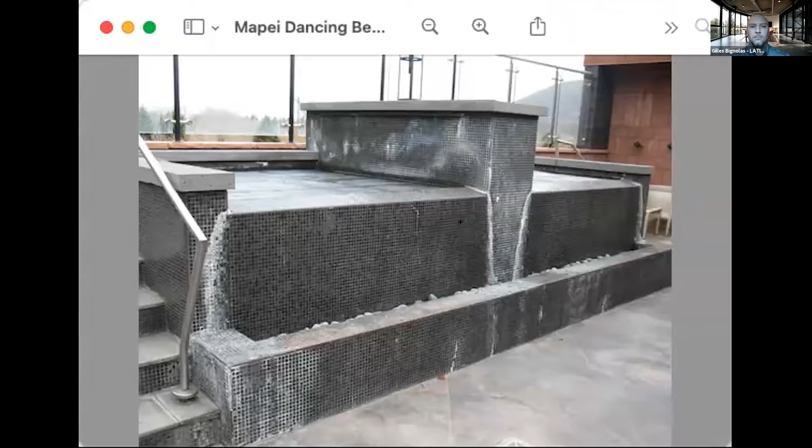Hey, real quick, Gilles had his hand up to comment on something there. Can we go to him? Yeah, I just wanted to note that typically for cementitious grout, we tell people to wait 14 days. If it's an epoxy grout, we tell them 10 days. But I also want to emphasize the fill rate. After that 14 days, you want to fill that pool at about 1 inch an hour.

So about 2 feet per 24 hours, because the expansion that happens when you're filling the pool can be tremendous. Typically a 50-meter pool is actually going to expand almost a 1/2 inch just by filling it with water. So having all the materials completely cured is very important, and filling at the correct rate so that it doesn't blow out everything, especially when there are no movement joints.

That's it. That's all I had.

Yeah, awesome. Again, you're seeing a picture of a large hot tub in a hotel in Aspen, outside, of course, and lacked cure time, and just a phenomenal amount of salts coming out of it. Jim, can you explain for all of us, just so we really understand what that white stuff is that we're seeing there? What is that stuff?

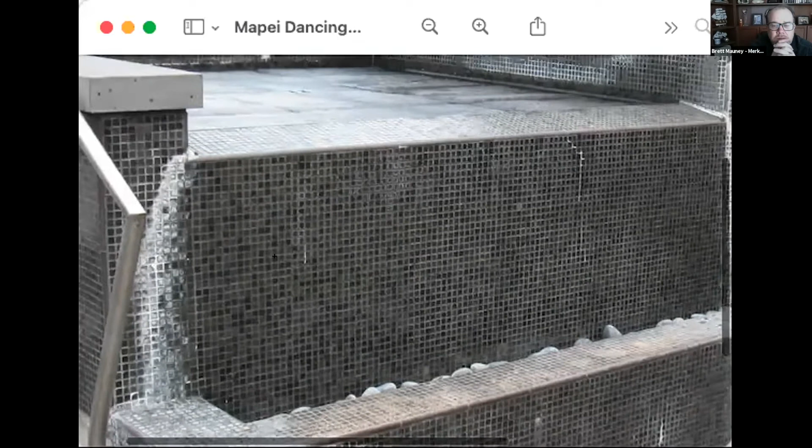So you're seeing a couple of things there, actually, and that's where it gets a little bit confusing. The easiest way to talk about efflorescence is soluble salts. So that means if I wet it down, it typically kind of goes away, right? Because it's soluble. And it's in the alkali that's in cement; there's a water-soluble alkali in cement. And if it doesn't cure properly or it gets really soaked early, sometimes they'll come to the top. You see it more frequently in grout.

Latex leaching is a different animal, and that's what you see on that back wall, where it actually looks like diluted paint coming down through it. And that's not the same. You can wet that down and it'll stay there. That's just latex coming out with the water. So it's a solid. When it hits the air, it wants to become a solid again. But when it's in water, it doesn't. So you're seeing a couple things going on there, unfortunately.

Does that help? Yeah, that does help, Jim. Thank you. And the easiest thing to help prevent this is cure time, right? Yeah, correct. Cure time and scheduling. And this is Mike Micalizzi. Another issue that we see a lot is these exterior applications aren't protected. So you can get rain or snow. You've done a beautiful job, everything's perfect, and then you get rain on all your materials before they set or cure. And as Jim was saying, you get all that latex leaching out. So protecting it for a period of time afterwards is also important.

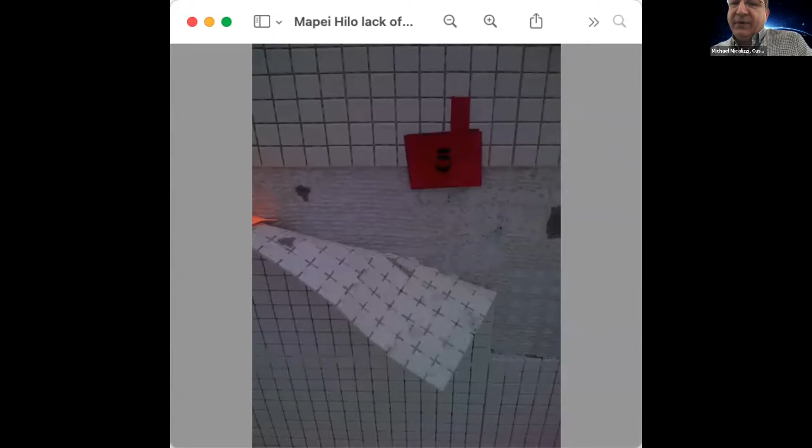And if I could add something to that, Jim, one of the things that we've seen on these glass mosaics is contractors are going to beat the tile in with a rubber float. When the rubber float gets wet and you start beating it in, sometimes it causes a suction. When you're pulling the float off, it literally can cause some voids under the tile. So you have to be careful when using your float that it's not too wet.

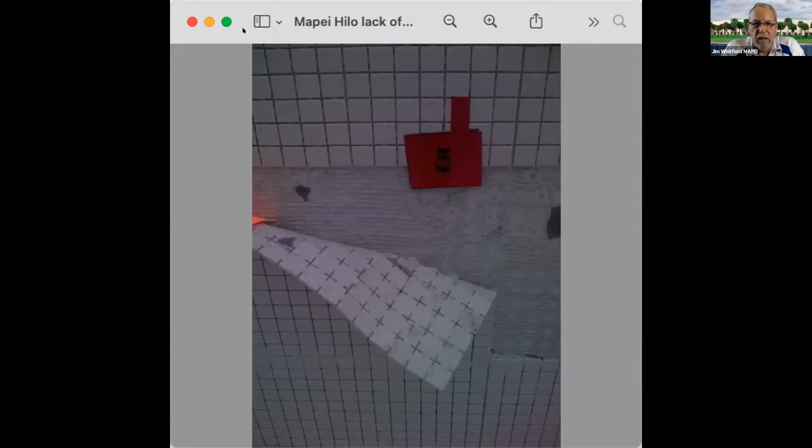That picture there just speaks volumes. It's a shame. On coverage, it's a true shame. Again, this is a large school. This is a big pool, and it had terrible coverage. Chris Kane.

I wanted to mention, it's been mentioned about protecting the pools from rain and snow. I think it's also important to mention protecting it from temperature as well, especially the outdoor pools. Everybody wants their pools for summer, so their pool's done in winter, spring, maybe the fall. And even if it warms up during the day, what's happening at night? So it's important to monitor that, the period before, during, and after the install has to be within range for the temperature.

Good point. Chris, what would that temperature range be normally? Well, it depends on the product. You definitely want to be above 40 in all cases, and sometimes it could be above 50 or 60. At the same time, you don't want to be too hot either, so usually not over 90, just general rules. And even though it might be 50 or 60 air temperature at the job, what was it overnight? Is that substrate in the 20s?

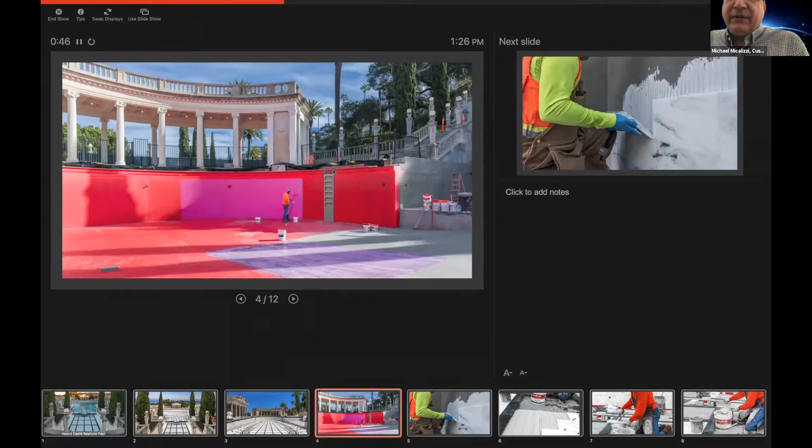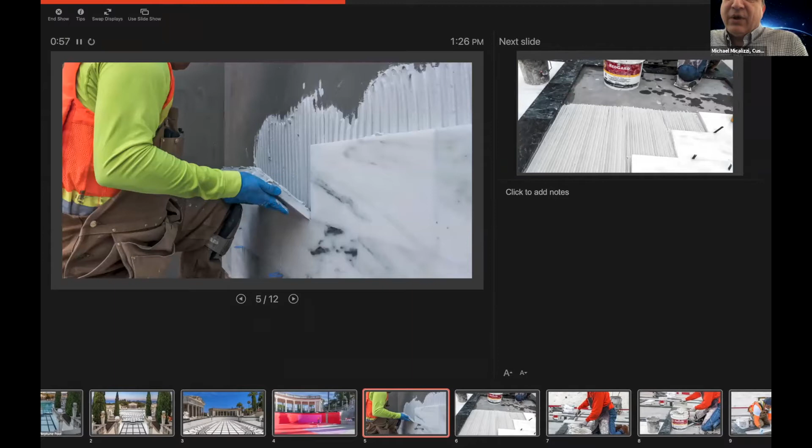So all of the things we've been talking about are real critical, being able to protect the surface and keep the water from going. All of the penetrations when they used the waterproofing, they had to be really careful because you wouldn't believe the elaborate system that they had directly below the pool that monitored all of the filtration and the water flow. The engineering underneath this pool was amazing.

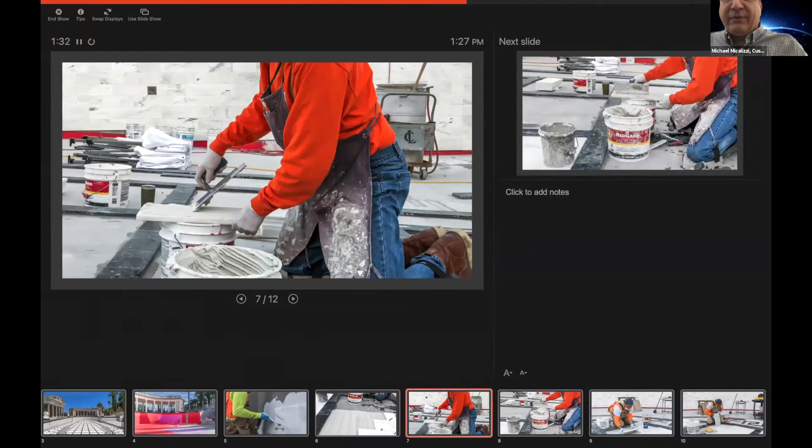And the other thing that was critical was, and this is funny, the stone that was inside the pool, the pitches were not correct. So they had some areas where it wasn't flowing properly. But the Historical Society said that these contractors had to do a topography of the entire system and reinstall all the stone exactly the way it was, right or wrong. So that's what they had to do. So they had to map this whole thing out.

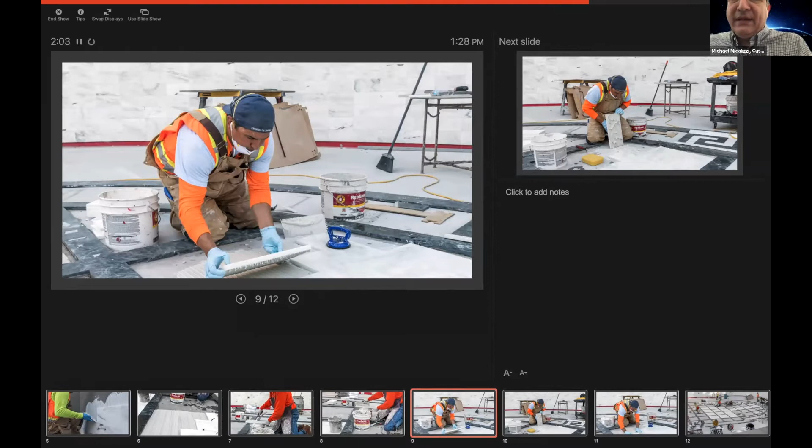But the critical aspect here is, if you see in these series of pictures, the guys took real care to make sure they had good mortar coverage. That was one of the big concerns that they had. Like you see here in the top right picture, every stone that they put in, they picked it up to make sure that they had good coverage.

Yes, thanks. So, I hate to harp on glass tile, but glass tile has become very popular and it's used a lot in the pools. And what we're finding is there have been failures due to the resins that are used in order to put the sheets together, in order to bond. And so what you run into is as the pool goes underwater, some of the glues that they use to adhere the mesh just start to dissolve or start to react in the pool environment. And the next thing you know, your tiles are failing.

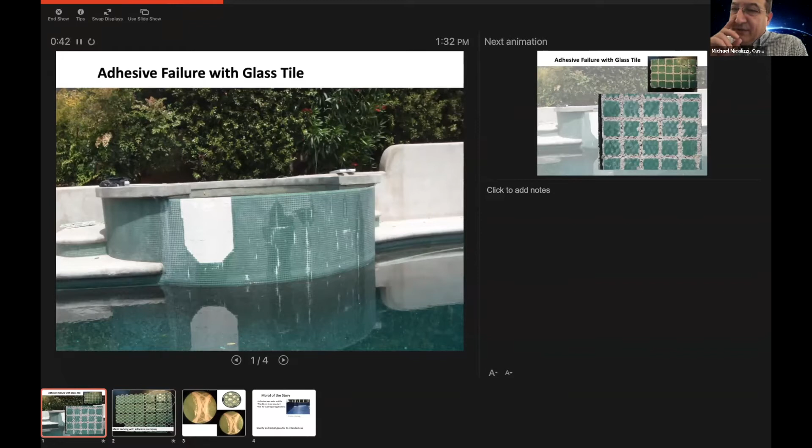People send in tiles for us to test so that we can do bonding tests and do them in an immersed area. And we look for reactions like this. But one of the first things that we do when we receive these samples is we take the sheet and we put it in a bucket of water, and we leave it there for probably 5 days, 5 work days. Check it on the following Monday, and see if the tiles stay well adhered, and see if there's any reaction. So I would suggest strongly that if you have any mesh mounted tiles you're going to use in a wet area, that be the first thing that you do.

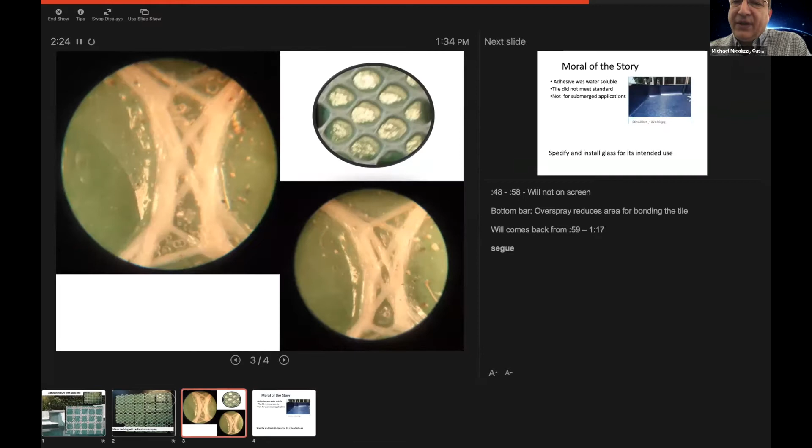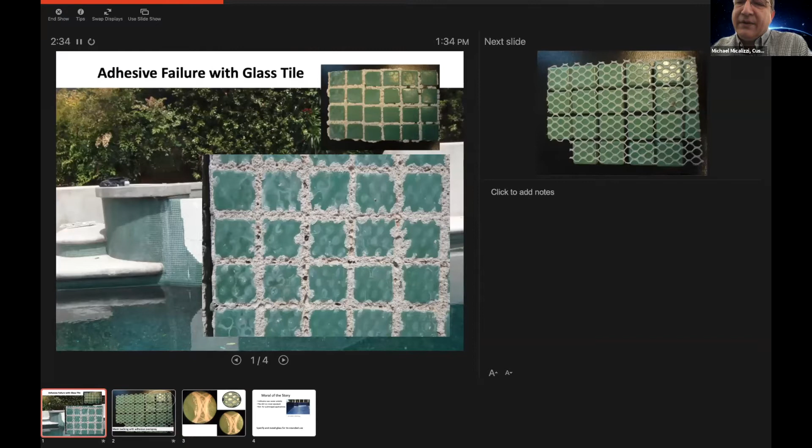We've done bond tests with different tiles with resins on the back, and with resins that are applied very thin, we can get a really good strong bond strength. The ones with a really thick buildup of resin, your bond strength is diminished, could be up to 90% reduction in bond strength. So it's something just to be very aware of. Anytime you have a mesh, do some really good testing, send it into your manufacturer that you like, have them take a look at it for you, before you have to go through the nightmare of replacing it.

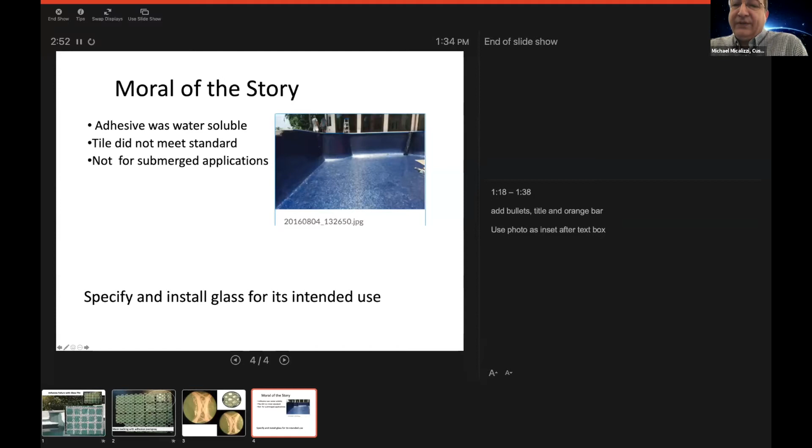And someone asked where these tiles are coming from. I think we all know that the knockoffs that people purchase out in China have been a major issue, not just for glass tile, but for tiles claimed to be porcelain, but they're really not porcelain. And then they're installed in a wet area and they warp and have absorption rates that are not at 0.5%, but more like 10 to 12%. And so they've been a real issue. So anytime that you get something outside the country, it's something to look at and consider.

But I would say anything that's mesh mounted, put it in a bucket of water. That's your first test. And then if you want, contact your manufacturer. Most manufacturers are more than willing to take a look at the tile for you and give you some feedback and help you through the project. And note that the larger the glass tile, the higher the risk because of that thermal expansion component of glass. So the larger the glass tile, the more the risk.

Also add something just to piggyback what Mike is saying and what Greg is saying. ANSI A137.2, right? The glass tile standard now has a submerged methodology to evaluate if glass tile and glass mosaics are suitable for submerged applications. So Mike gave you all the tips on looking for that, but there's an actual ANSI standard for it now. And it's a submerged application that's an extended type test. So you could even ask your glass manufacturer, do you have A137.2 certification for this glass to be used in submerged applications? And that usually is a good qualifier too.

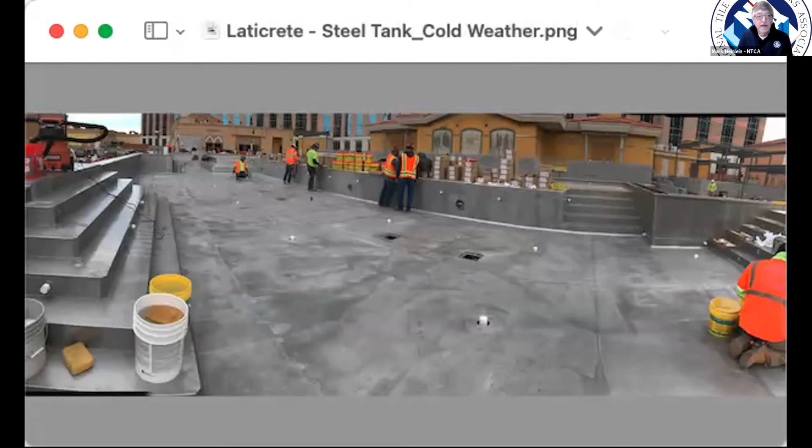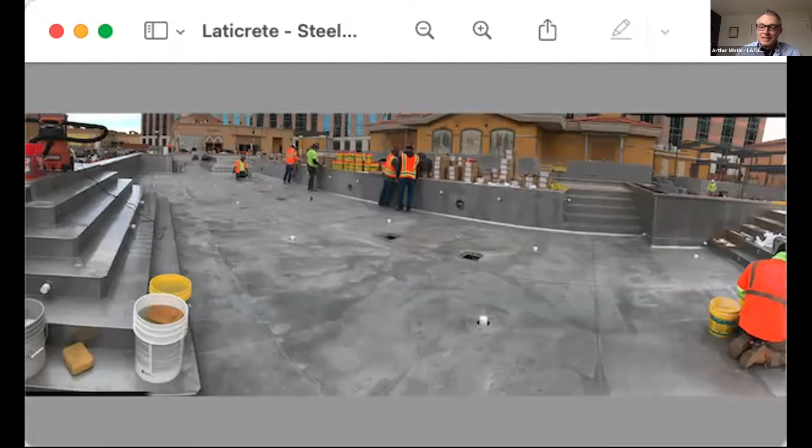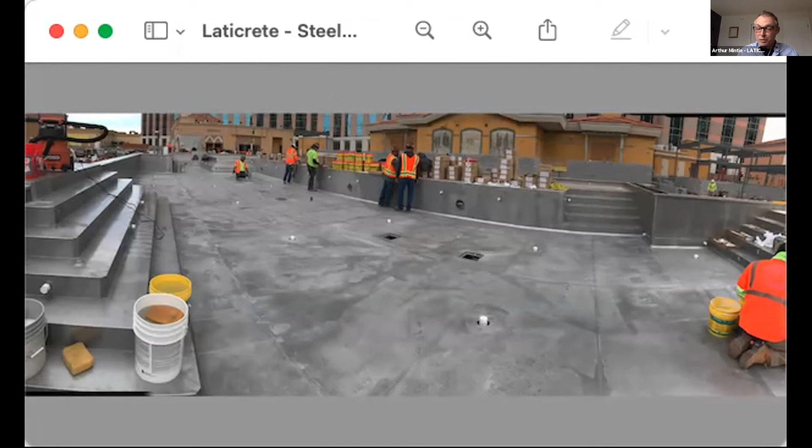Okay, so I just wanted to highlight how there are different types of pools out there now too. We're always used to the traditional concrete cast in place or formed gunite type pools. But what we see increasing in our industry are these steel tanks. Now, this one is a massive steel tank. This is on top of one of the hotel casinos in Las Vegas. And if you take a look at this, this is pretty impressive. And it's really a simple installation, believe it or not.

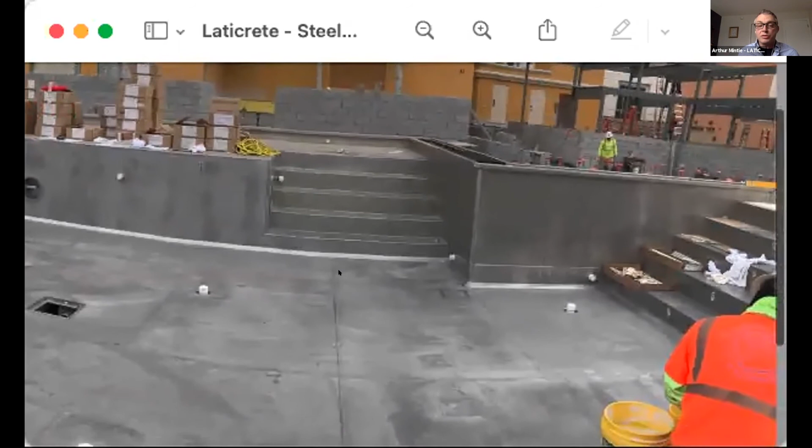Obviously, everything has to meet deflection criteria. The conditions have to be good. But basically, it's a direct bond adhesive type with an epoxy adhesive. And then you grout it with an epoxy grout. And these types of tanks are solid. You cannot get that tile off afterwards.

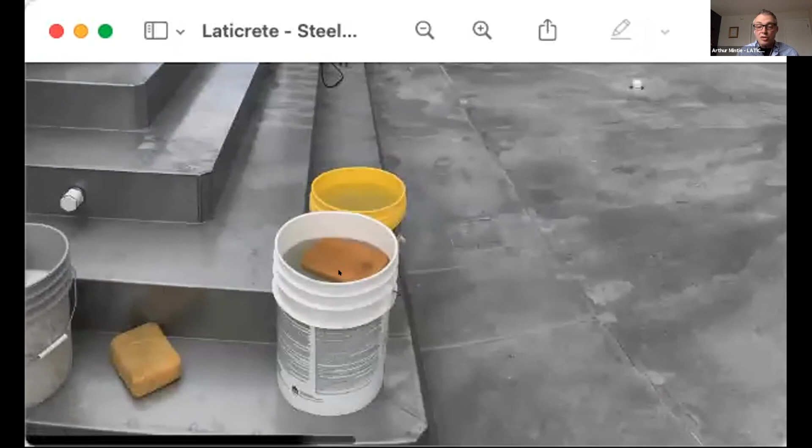And the benefits to these systems are that they're very lightweight in comparison to their concrete counterparts. So they're installed in places where you typically wouldn't see pools. They can also be hoisted and lifted into place after the fact for renovation purposes. And the great part is it greatly expands the opportunity to consume more tile.

And that's what's interesting to all of us, right? So I just wanted to highlight this, and this is something that's very popular. And at some point, I hope that we can get some installation methods in the handbook for this, because it's very, very popular and very successful as well.

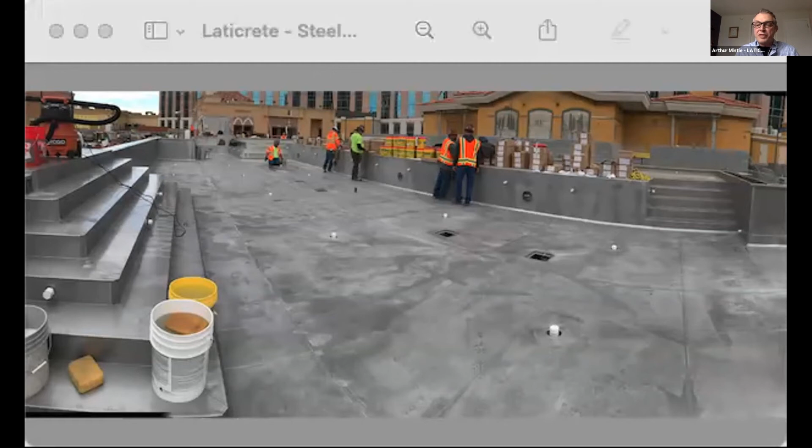Art, will you talk about cleaning it? Sure. So most of the steel tank manufacturers are going to have their own proprietary protocol, if you will, to clean it, right? They call it a pickling process or passivation. And it's basically just some sort of method that removes any fabrication oils, because as they're putting this together and welding it, there tends to be some residue from fabrication. So just follow their proprietary method of removing that and let it dry, and you're good to go. It's that simple. It is an important step.

And the only other thing I'll mention is that where we can run into issues with stainless steel is with transparent glass. Sometimes the adhesives that we have to use for steel are not as white as what we typically want used with regular cement type pools. And so sometimes you can change the color of the glass, and that's another important thing to test if you're doing mock-ups, is how the adhesive may or may not affect the color of the glass.

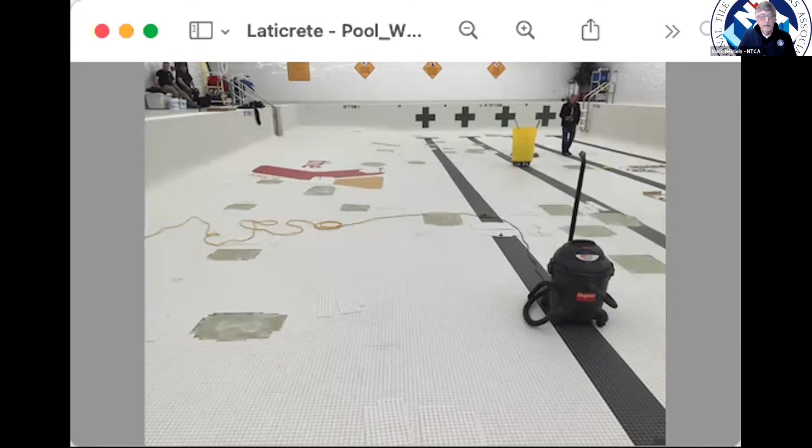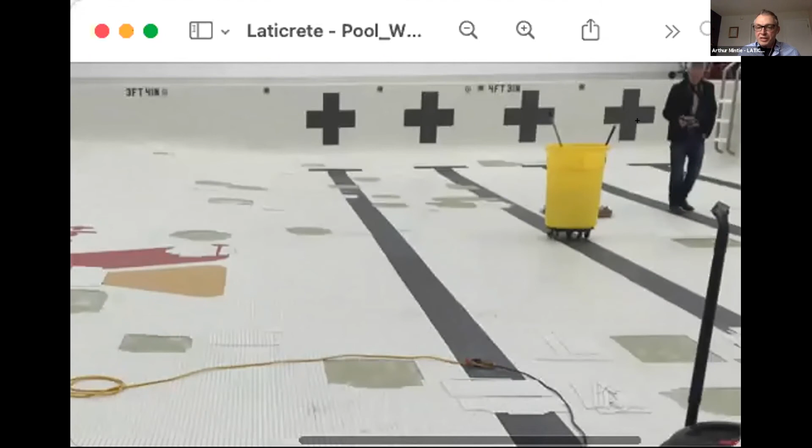To shift the photo on you there, Art. What are we looking at here? Okay, so we all have these great photos of semi-catastrophes or major catastrophes in our portfolios, right? We've all been on the movement joint issue, and that really is probably the most critical element in these applications. And we hear the argument all the time: once I fill my pool with water, nothing's going to move. You're right. However, in practice, these vessels, no matter what size they are, require maintenance of some sort. Maybe it's not even the tile that needs maintenance. So they're emptying the pools, refilling them, on and on.

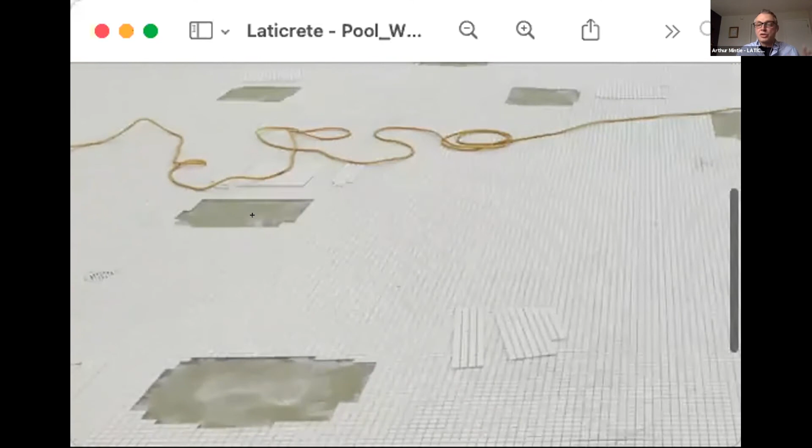So this is a pretty large pool in a public recreation facility that had no movement joints in it at all. So guess what happens when you empty the pool? Jill mentioned water drain and fill rates. On the draining side, draining a pool is really stressing the installation, especially if it's exterior, because you're removing the entire weight of all that water very quickly. The top surface is going to dry out quickly in the sun, while the bottom layer remains saturated. You've created a huge differential. And what happens? You get pop-outs. The tile will actually tent. That's what happened here: no movement joints, the pool was drained very quickly, and we got pop-outs.

And now there's a membrane that's installed directly underneath the tile layer. Guess what that membrane is trying to do? It's trying to accommodate that movement. It's like, oh no, there's a lot of stress here, I'm trying to keep it together, but the membrane is probably the weakest point in this application. And when that stress builds up, you get these pop-outs. So this is another good example of why movement joints are so necessary in submerged applications.

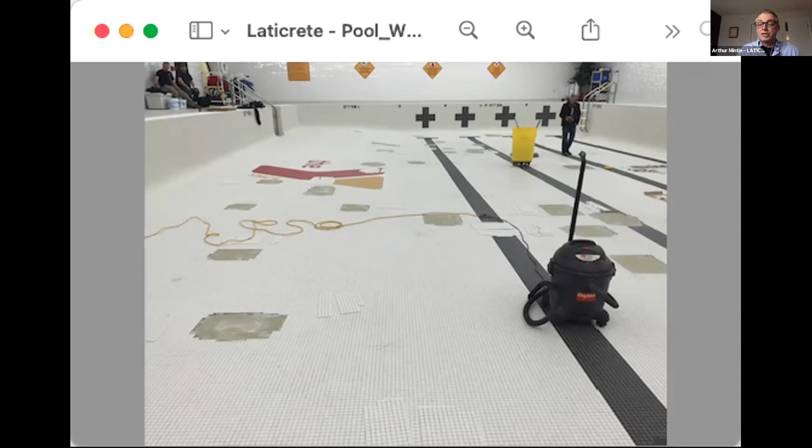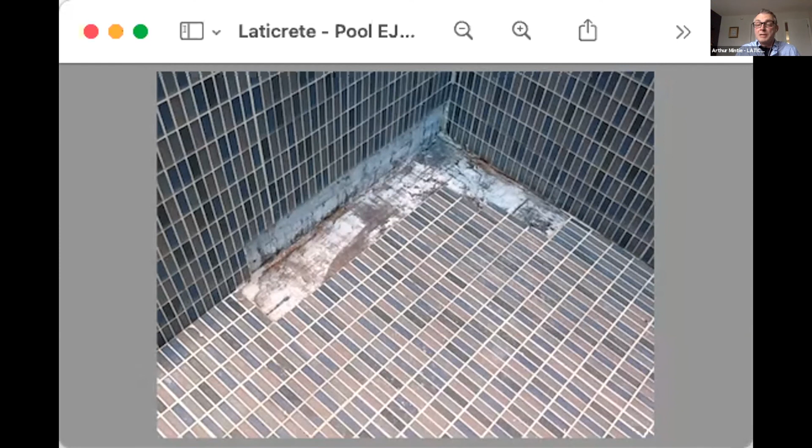The steel tank manufacturers want, maybe not you, the tile installer, but want the builder to pre-fill the tank before you tile it to somehow stretch it, to make sure that it expands properly before you even tile it. So it's a fallacy that steel tanks don't move. They will also expand and contract, and therefore you need proper movement in these applications as well. And that's what happened here. Fortunately, it was a localized pop out and it wasn't destructive across the board.

And our last photo from you, Art.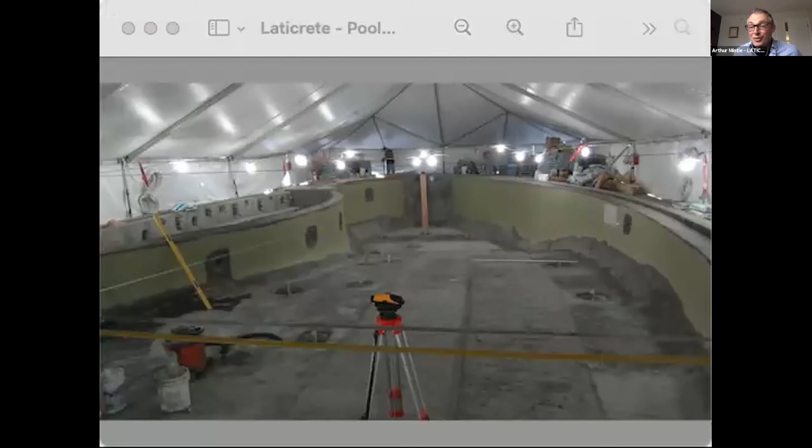Okay, so my esteemed colleagues, Greg Shad mentioned this, Mike Michelizzi mentioned this, Jim Whitfield mentioned this. When you're working in these projects, especially outside, you can be in some pretty intense conditions, right? So this is one of our good builders who put this together. Southern California, in the sun, in the summer, it's 105 degrees air temperature, but your surface temperature could be much greater than that. So you might have to tent the project. Sometimes you might even have to cool it or heat it, depending on what extreme you're at. The point is be cognizant of your environment.

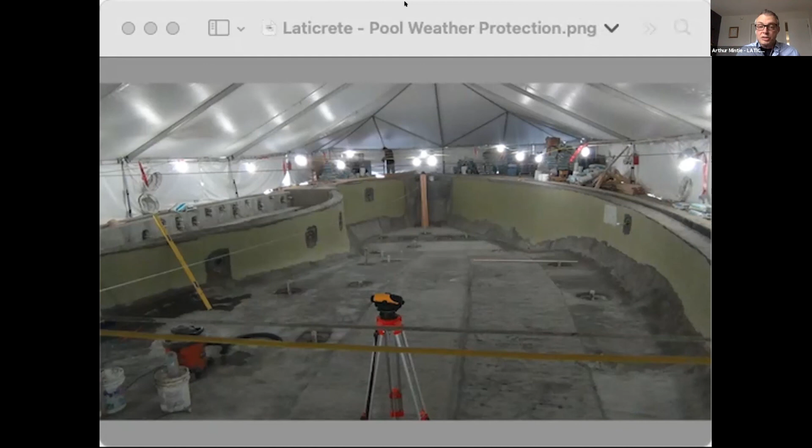The installation materials have a certain bandwidth of where they can work, right? And most of them top out at 90 degrees or 95 degrees, give or take. And if you're above those temperatures, you can experience some pretty serious issues if we're not controlling the climate that we're working in. So for the tile installer, there's no way you can carry this in your budget and be competitive, right? So this requires negotiation. It requires some sort of dialogue with your pool builders and with your general contractors to make sure they put you in a good place to be successful, or else you could have a lot of challenging issues on your hands. So this was just a good example of a tented pool, and the conditions in here were much better than what they could have been without protection.

That is some incredible information right there. Mike DeGiusti. Yes, sir. Do you have anything to add before we segue over to our Ask the Ref game?

I just want to add that, in my opinion, it's so critical for the tile contractor to get with whichever setting material people he's going to use, do a job site visit, make sure everyone's on the same page, address the stuff we've heard about hot, cold, control joints, because they're not going to be given to you by the builder. So you'll have to decide where they're going to go, and just make sure everyone's on the same page and use an entire system so that you get a nice warranty.

Absolutely. Any of our panelists wish to comment?